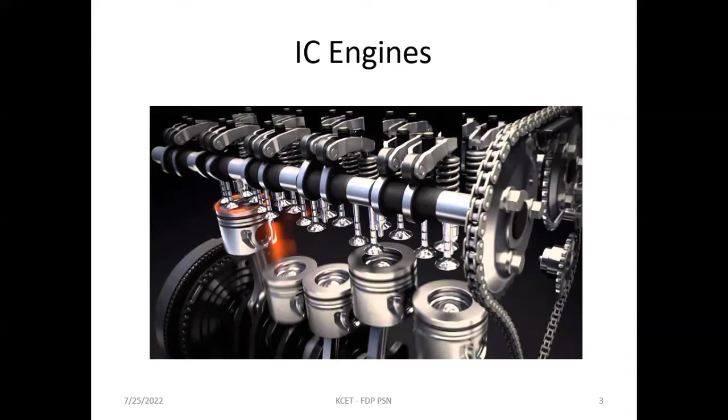This picture shows the IC engines. We already know we are using petrol and diesel as the fuel of vehicles. Nearly 98 to 99% of today's vehicles are IC engine based vehicles only. The main disadvantage is we are consuming more fossil fuels and the pollution is more in IC engine based vehicles. That's why we are moving to electric vehicles.

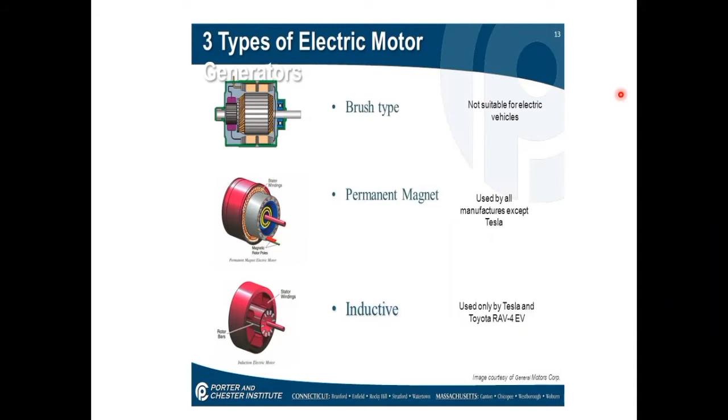The main thing is torque weight ratio. If you see for the induction motor, it will be lesser. So the weight will be lesser for the same capacity. So that's why most of us are using induction motors for many industrial applications. In future, due to the emerging VFD technologies, all the vehicles, I hope, will use induction motors.

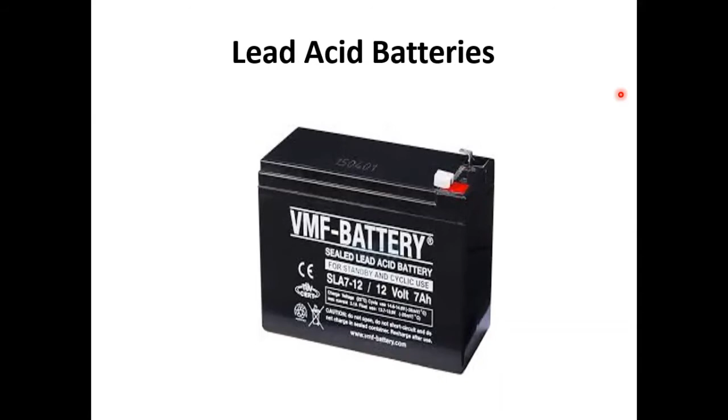Next, we can see the basics of lithium ion batteries. Lithium ion batteries, I think you all know, the energy density and power density are both good. And size, if you compare it with the lead acid battery which most of us are using in our home for our UPS, for the same capacity, for example a 12 volt 100 Ah battery, the lead acid battery size will be very large compared to lithium ion.

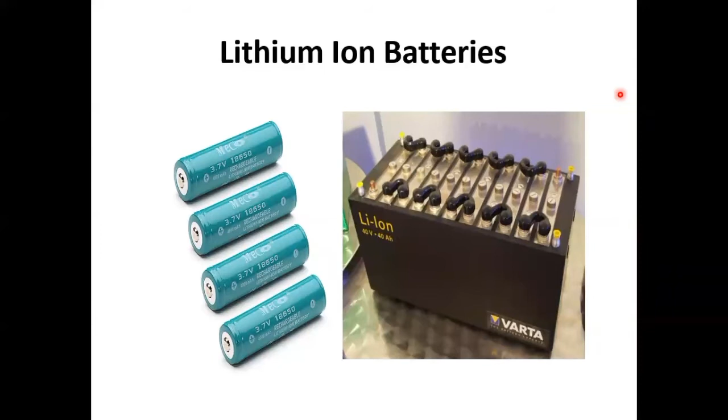And also the energy density and power density will both be higher in lithium ion batteries. That's why we are using these batteries for electric vehicles. We need to reduce the space and also we need to extract more energy. Nowadays, due to the explosive nature of lithium ion batteries, most of them are focusing on other technologies. One is lithium ferrophosphate. A lot of material research is going on there. In most of the cases, they are also preferring lithium ferrophosphate.

The main parameters in batteries are C rate, watt hour, ampere hour, and voltage. C rate, that is the charging rate, is mentioned in quality lead acid batteries also. If you are asking for a battery in any shop, surely they will ask about voltage and ampere hour. Most of the shops don't ask about C rate. Now in most applications we have to focus on C rate also. Lead acid in our home is 0.1 C or 0.2 C, that is C10 or C5 type. So this C rate is also very important.

I will explain what C rate is in later slides, and we are also going to see some simulation analysis for these parameters, watt hour, ampere hour, and C rate. So later on we can see it in detail.

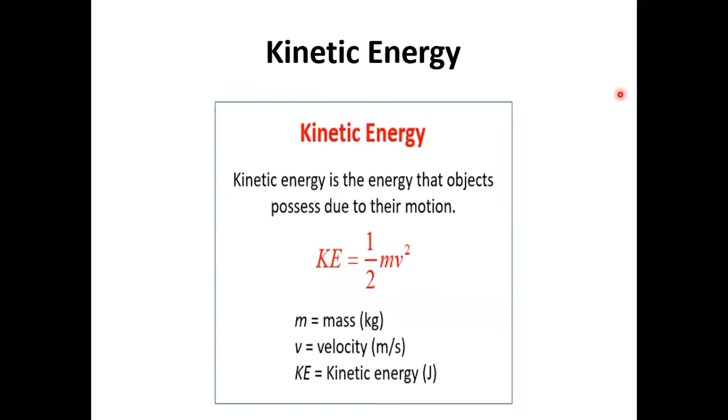So instead of wasting that energy, with the help of a generator, we can extract the kinetic energy stored in the vehicle. That is the ultimate aim. During running condition, this motor generator set will operate as a motor and drive the vehicle. Whereas in regenerative braking, the motor is operated as a generator to extract the power stored in the electric vehicle, and it stores that energy in the lithium ion battery or any batteries available.

A huge amount of power we have to extract within a short time. At that time, even a lithium ion battery cannot store that much power. That's why in most vehicles they are using an ultra capacitor or super capacitor in order to store that huge power. So this is about regenerative braking.

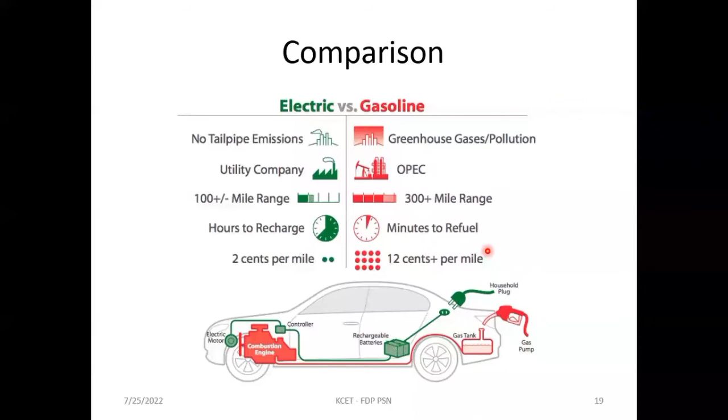Another biggest advantage in going for electric vehicles is the V2G and G2V concept, that is vehicle to grid and grid to vehicle. This is also a blooming area where we can make the power system operate in a smarter way to have better reliability and stability.

So in a charging station, your electric vehicle can be operated in both modes. It can charge or it can discharge. Why does it need to discharge? To support the power system, to match the load demand, to provide better reliability. So both things will happen. So this will make the power system operate with good reliability and stability in the near future.

So vehicle to grid means from the vehicle, power is fed to the grid. That is why it is mentioned as V2G. From the battery, power is fed to the grid through power electronic converters and various equipment between vehicle and grid. Then G2V means grid to vehicle. So from the grid, power is given to the electric vehicle to charge the batteries. This is the G2V concept. This is also possible in a smart grid.

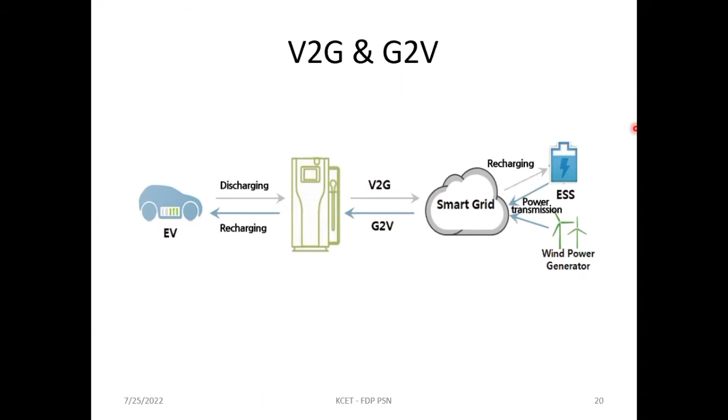Companies are working there. Now Tata Power has installed many charging stations in India. Even in Madurai itself we can see a lot of charging stations. Let's see some electric cars available in the market. This is the 2021 scenario.

Hyundai Kona will cover 452 kilometers per charge. If you charge the battery, you can go up to 452 kilometers. So this is the biggest achievement. For all the motors nowadays, the coverage is very high. Mercedes-Benz has the EQC, MG ZS EV, Tata Nexon EV, it's around 312 kilometers. And Tata Tigor EV, this is 213.

It's the old model. The upcoming models have reduced charging time and high mileage, high kilometer coverage. And Mahindra e-Verito, this is also an old model, around 140 kilometers and 181 kilometers. So this is the 2021 scenario. If you see 2022, more changes may happen. Let's see international cars. These are all in the Indian market.

You see US Tesla. I hope all of you know about Elon Musk and his lot of innovations. Starlink and spaceships they are manufacturing. Tesla has achieved a big thing in electric vehicles. They are also manufacturing batteries, and they claim their batteries can charge within 3 to 4 minutes. So 20C they are claiming. After this discussion, I will tell you what is the meaning of 20C.

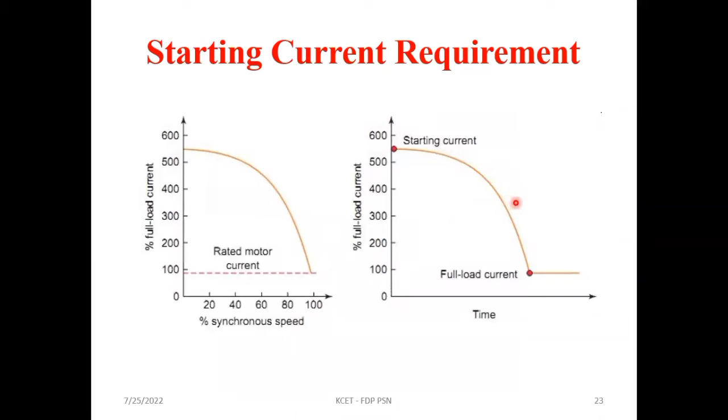Now we can see the basics of batteries. Capacity is normally indicated in ampere hour or watt hour. Voltage rating we all know, in volts. In C rating, they mention C1, C2 or C5, or else 1C, 2C and 5C. Like that, they will mention the C rates, that is the charging rate.

What does 1C mean? For example, if a battery is rated 10 Ah and the C rating is 1C, you can charge the battery at the rated specification mentioned on the battery, that is 10 ampere. So that is the meaning. 1C means you can charge the batteries at a rate of 10 ampere.

Whereas if that battery is mentioned as 2C, you can charge the battery at double its rated capacity. Then it is 20 ampere. So a 10 Ah 2C battery means you can charge that battery at a 20 ampere rate.

Whereas 5C means you can charge that battery at a 50 ampere rate. That is the meaning, if it is indicated before C. If it is after C, it means 0.1, so at the rate of 0.1C. So a 10 ampere hour battery C1 rated means you can charge at the rate of 0.1 rated capacity. 0.1 means 0.1 into 10 ampere; that will come around 1 ampere.

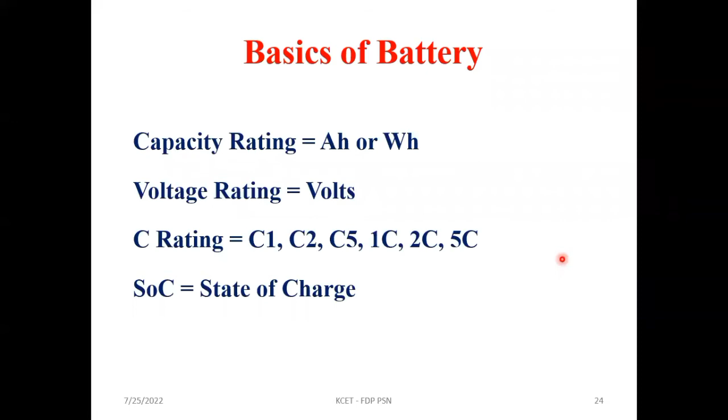So Tesla is claiming that they have a battery with 20C rating. Then you put the calculation: their battery is fully charged within 3 minutes. They made this statement in 2019. Now they may have more than that, but I didn't get that detail these days. In 2019 itself, they said they have batteries with 20C rate, so within 3 minutes you are able to charge the battery. Only thing is we have to focus on lifetime and health of the batteries. For that, they are reducing the charging time to the optimal level. But that is the biggest achievement. So these are the basic things.

If you compare a capacitor and a battery: capacitors can discharge huge power for a short duration, whereas batteries discharge less power for a longer duration. That is the difference. So during the starting of the vehicle, in order to assist the motor, supercapacitors are used. There the power density will be higher and energy density lower, whereas in lithium ion both will be higher in range. But comparing supercapacitor and lithium ion battery, in power density the supercapacitor will be more. That's why we use it along with lithium ion batteries in electric vehicles.

That's the meaning. Now we can see some Matlab simulation. I will show it; that will give you some clear insight about the charging.

I'm going to share. Shiny ma'am? Yes, sir. Is it visible? Yes, sir, it's visible, sir. Yeah. I hope all of you see this simulation file.

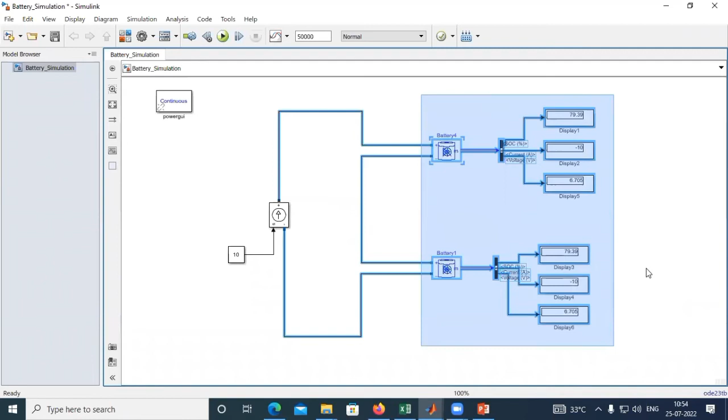Normally, lithium ion batteries do charging like this: up to 80%, they use current controller based charging. After 80% of SOC, they convert to voltage control. That is a different case. For a simple understanding, I am going to do some simulation analysis. Okay. Wait a minute. Its response is very delayed. This is the battery.

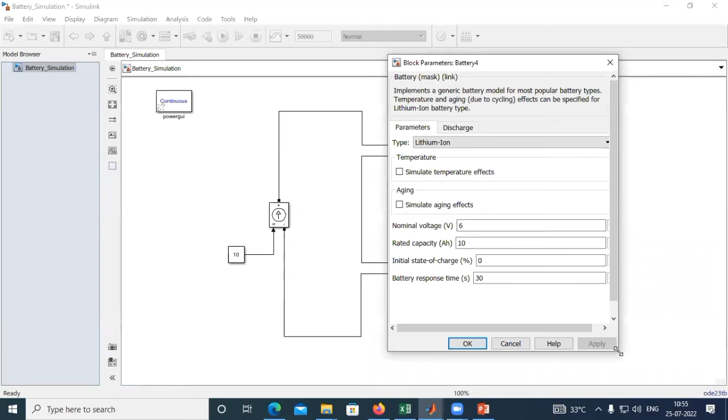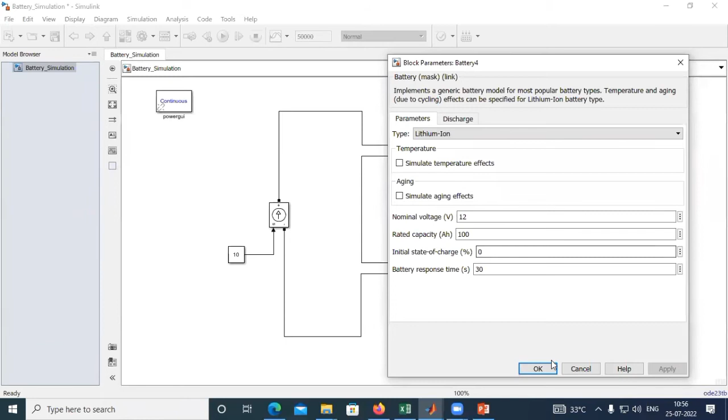So to give all the parameters, you can see for the case which I already told. I'm going to give a rated capacity of 100 ampere hour, voltage, and initial state of charge 0%. Just note it down: voltage 12 volt, 100 ampere hour, initial state of charge 0%. Okay, I'm going to analyse with two batteries. See for a battery also.

Slowly responding. So bear with me.

So I am going to charge one battery. I already showed the C rating also. Okay. 100 ampere hour, 12 volt, 0 SOC, state of charge, for analysis purpose. So at what rate I am going to charge: I am going to charge at the rate of 10 ampere. This is a programmable current source. Whatever value I give, it will deliver as current. So I am giving 10. So 10 ampere at a constant rate.

Okay. So I am going to simulate this. You can see the state of charge. It will start from 0. This upper one is state of charge. Another is charging current, and the terminal voltage of the battery. These are the 3 parameters indicated. Okay. State of charge, current, voltage.

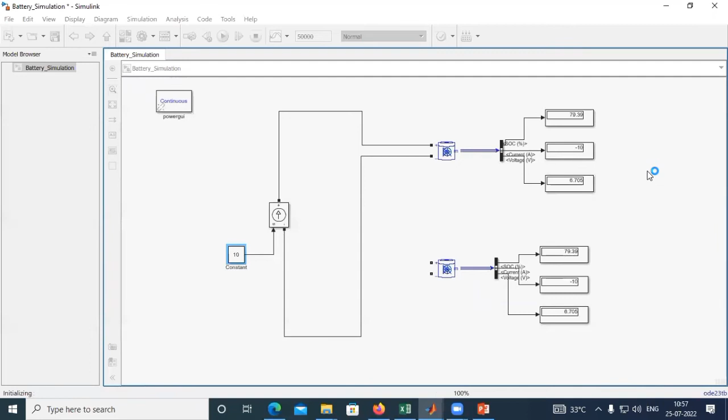The state of charge gets increased. Charging current is 10 ampere. From external, the battery gets charged. That's why it is indicated as -10. You can see the timing. Here it is mentioned as seconds.

Sorry, actually, we are using a 100 ampere hour battery. So our charge for 1C is at 100 ampere. Since it is 100 ampere hour, I am trying to charge at 1C rate. Then I have to give 100 ampere. That's why I am giving 100 ampere. You can see the simulation timing here. It is in seconds. This battery should reach 100% SOC at 3600 seconds, because 3600 seconds is equal to 1 hour.

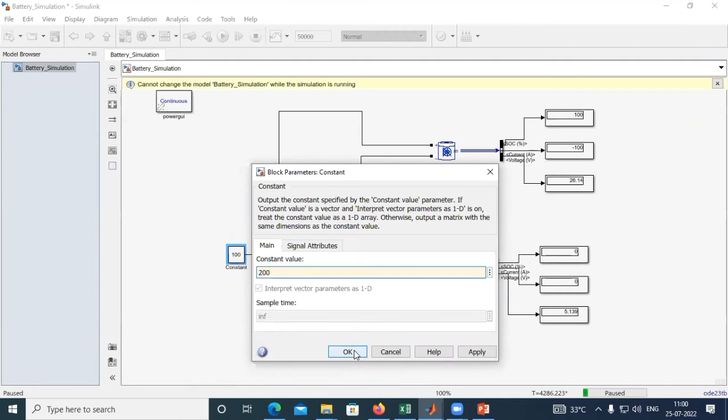For the same battery, if I am charging at 2C, 2C means twice the rated. So 100 ampere hour, twice the rated means 200. I am providing the charging current 200. Ultimately, the battery gets fully charged at 30 minutes. That is 1800 seconds. At 1800 seconds, the battery will reach 100% SOC. You can check with this simulation. Now I am starting the simulation. Sorry, I have already passed. Now only I am going to simulate. You can check, from 0 it starts. SOC starts increasing 24, 28, 30.

I'm stopping at 50. For 50% SOC, you check, 51.27. It's around 922. Our estimate is at 1800 seconds, that is at 30 minutes, it will reach 100% SOC. You see. 100, and I have stopped exactly at 100 and 1802 seconds. It crosses 100% SOC. That is the meaning, because you are charging the battery at 2C rate. This is how we have to do the charging analysis. Okay.

What about 0.5C? We can say it as C5. C5 means your battery rated is 100 Ah. So 0.5 of the rated, that is 0.5 into 100, 50 ampere. That's why I'm giving charging current 50 ampere. C5 means 50 ampere for this battery. So now I am charging at the rate of 50 ampere current. Now our estimate is it will take more than an hour. For C5, that is 0.5C, it takes 2 hours. 2 hours, if you convert that into seconds, means 7,200 seconds. At 7,200 seconds, it will reach 100% SOC. You can check.

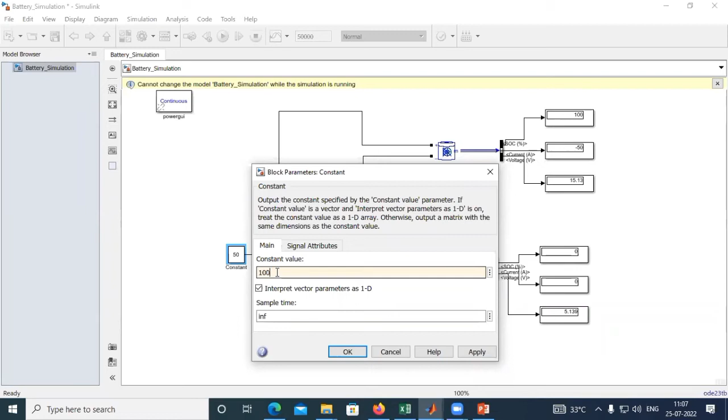So I am going to charge both the batteries with the help of a source at 1C rate. 1C means rated current, that is 100 ampere. Both the batteries are in series, so the same 100 ampere current is given to both the batteries. For this scenario, the battery gets fully charged at 3,600 seconds, exactly 1 hour. You can see both the batteries' SOC levels are increasing in the same manner, because both the batteries are at the same SOC level.

It reaches, sorry, I stopped the simulation. Again I run it, because we didn't see the seconds. I want to show that also. It's fine. Now I paused the simulation. SOC is at 98.22, both the batteries are the same. You see the seconds, 3535. So both the batteries will reach 100% SOC exactly at 3600 seconds.

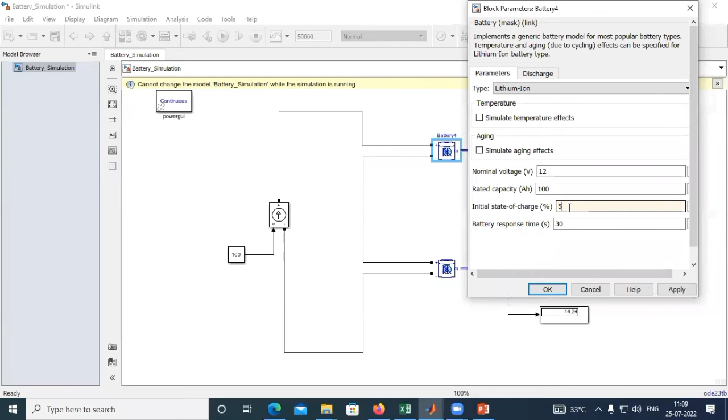Okay. Then we can do another analysis. Why not batteries at different SOC? Depending on material, charging, and a lot of environmental factors, the batteries' SOC level may vary. But before that, we can do another thing also. I am going to make the SOC 50. Here 50% charge is available for this battery. Here also 50% state of charge is already available.

Then both the batteries will fully charge at 1800 seconds, because 50% charge is already available. So in order to fully charge at the 100 ampere charging rate, 30 minutes is enough. Is it right? There it was 0% SOC. Now the batteries already have half of their rated capacity. So now I am going to start the simulation.

See, at 1800 seconds it will start from 50 and reach 100% SOC. Sorry, again I started the simulation instead of pausing. It starts from 50. Going to stop at nearly 97.8, both the batteries. It took 1722 seconds. At exactly 1800 seconds, both the batteries reach 100% SOC. Okay. That is the case where both the batteries are at the same SOC level.

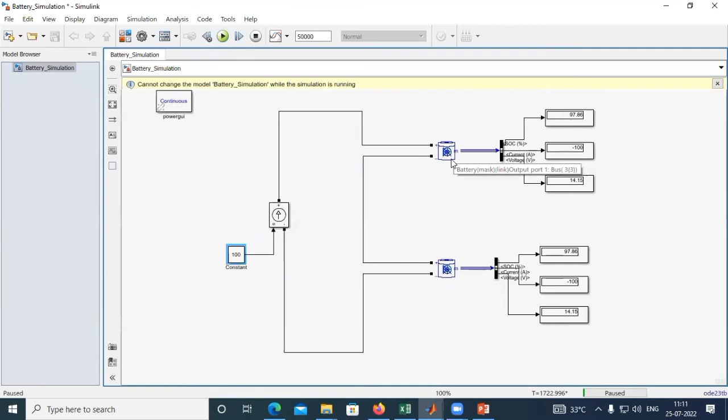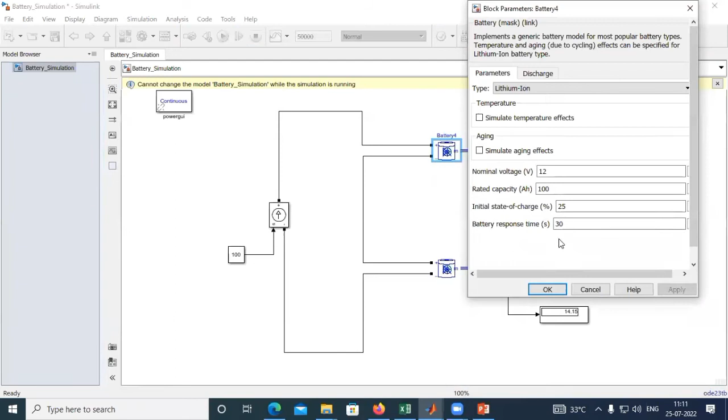What I am going to do is change the SOC level. Here I am going to have it as 75. Here I am going to have it as 25. Okay, you see, this battery is at 25% SOC. Another battery, which is connected in series, has 75% SOC. Now I am going to do the same charging analysis. At what time do both the batteries get fully charged? This battery reaches full charge very quickly.

After that, only this battery crosses 50, 70, 80. The total time required to fully charge both batteries in the pack took around 2700 seconds. Okay, you note it down. Here SOC is 25, here it is 75. So to fully charge the battery pack, the time required is 2701 seconds.

What I am going to do is another thing, using charge balancing. Normally in batteries, battery balancing techniques are there. They use two types of techniques. One is passive balancing and another one is active balancing.

Passive balancing is nothing but balancing of SOC level of batteries with the help of passive elements such as resistors. So they simply connect a resistor across the battery and discharge the mismatch charges. So the energy gets wasted in passive balancing, but the battery gets balanced. That is what happens in most of the batteries. You can check with a lot of manufacturers.

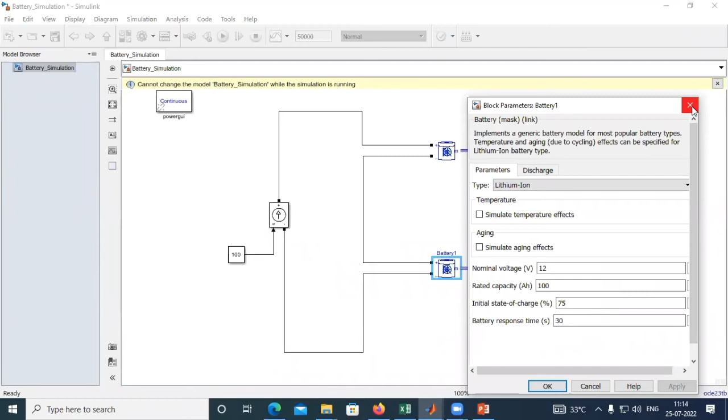Assume that here it is 75 and here it is 25 SOC. Here the energy is higher compared to the battery in this position. So what I am doing is using a power electronic converter, that is a DC to DC converter. Energy equivalent to 25% SOC is transferred to this battery.

So what happened? This SOC will become 50 and this SOC will also become 50, because we are transferring energy equivalent to 25% SOC from this battery to this battery. Now we have balanced both the batteries. Here also 50%, here also 50%. For the previous case, if you see, the energy capacity is the same. The difference is we are balancing both the batteries.

Now I am going to charge. After balancing, if I charge, the time gets reduced. You see, there it is 2770. I'm going to start the simulation. You see, the charging time is 1770 only. For the previous case, to fully charge your battery pack, it requires 2770. Now for this case, it requires only 1770.

So almost 1000 seconds we have reduced by balancing the batteries. After balancing the batteries, if you charge, the charging time gets reduced. So our electrical engineering faculty members can work on quick charging.

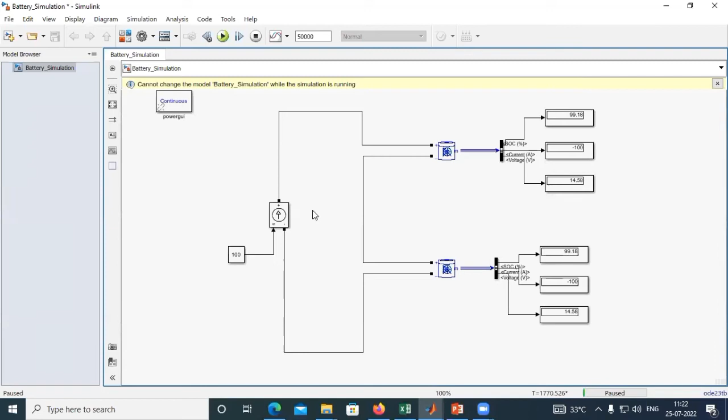So you can focus on charge balancing also. That is the hot topic in batteries, especially in electric vehicles. Large battery packs are there, and master-slave concept based battery management systems would be there. In that you can focus on battery balancing to reduce the charging time. Another important issue in batteries is state of charge estimation. I think most of you have heard the name SOC. Estimating the state of charge is the biggest challenge.

We also face this in mobile phones. When purchased, the charging level indicates correctly. After a few years, many of you notice that from one particular point of time, your charging level drastically goes down. If you take my battery, it will come down to 20% SOC slowly. After 20% SOC, it will reach 5 or less and even switch off within 2 to 3 minutes. That is the problem. That is due to lack of correct SOC estimation.

We are shown that this is your battery charge. What actually happens is, for me it is showing 20% SOC. It will not be correct. It may be 5 or less than 5. That's why the battery gets drained very quickly. It happens in all batteries, depending on battery capacity, manufacturing, all those things. But estimation is one of the biggest challenges in lithium ion or lithium ferrophosphate batteries.

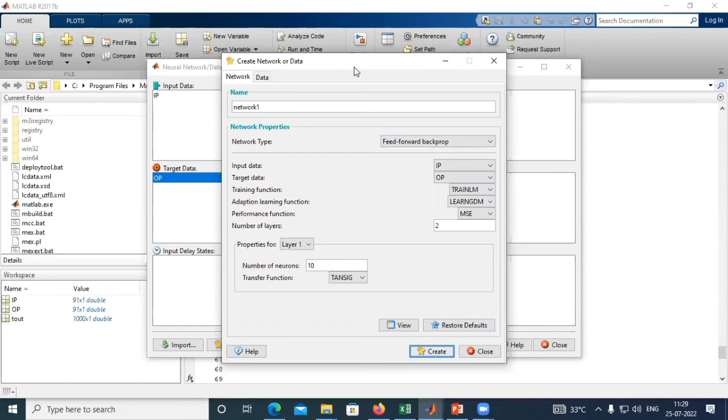Sorry, it's slowly responding. In recent MATLAB versions you can directly give the value, but the remaining things are the same.

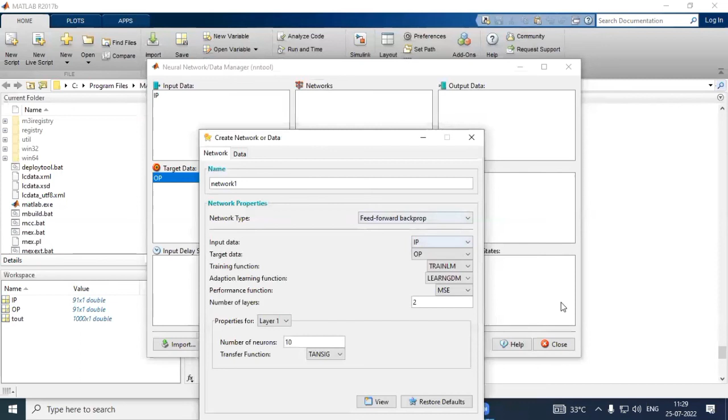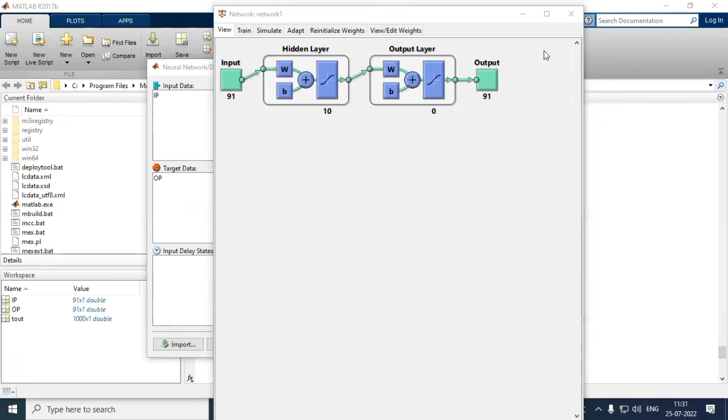Now you see the network here. You can double click to see the parameters. Then you have to again select train, input data and target data. You have to train the network. That's all. Depending on the number of trainings and the comparison, you can come to the conclusion that the training is enough, or else you have to train more times to get the accurate output.

You see iteration and performance here. For me, it's slowly responding; that's why it's consuming more time. Let's just check whether the network gets trained or not. Okay, anyway, given the time, we can leave it because it's very slowly responding.

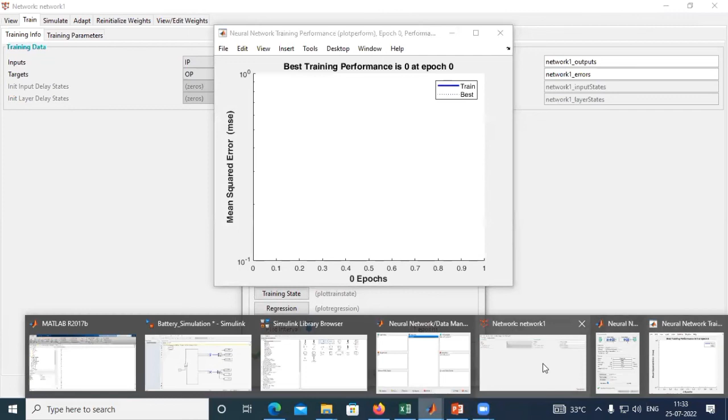Here, after training, you can see the output data as well as the input data. Here, the output is almost the same. After training, you can check the error values also. The error value is almost 0, so training is sufficient. Here we simulated less complex data; that's why the error is 0. Okay, now the training is enough. We can check for our own data.

What I am going to do is export this network, that is network 1. So now we have trained a neural network with our input and output values. This network 1 is exported to the workspace. You can see network 1 in our workspace. To generate a simulating file, you can type gensim of network 1, the file name.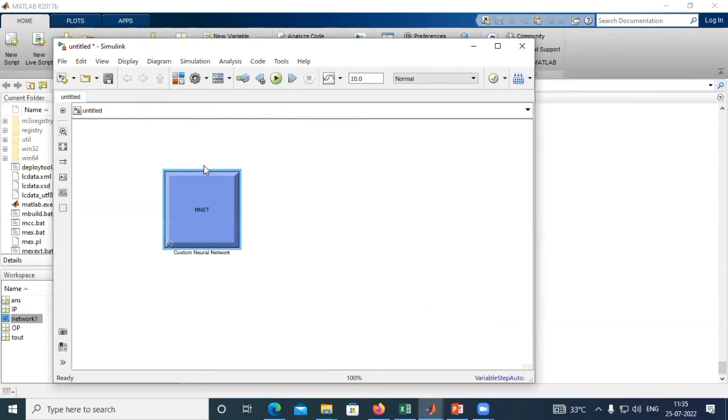One minute. Here, I think the new simulating file will generate like this. Through that, you can check your network by feeding the input data. Here, due to some issues, the input and output terminals are not there. Okay, we have to try it with different data. Just tried. The format, I think, is reversed. That's why the error is there.

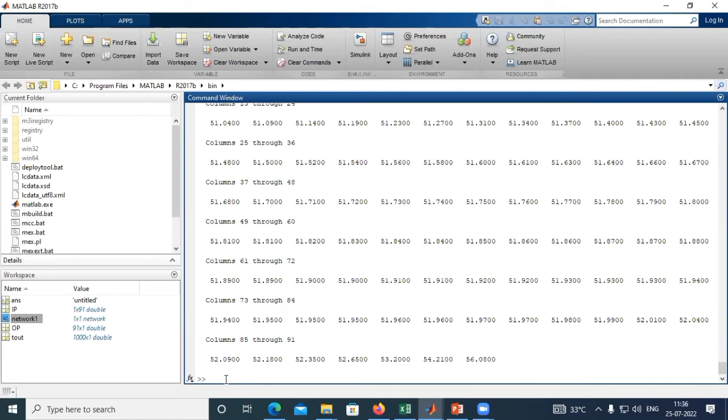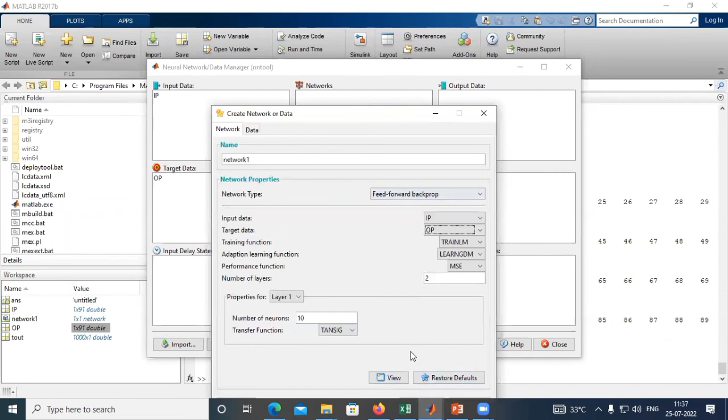So I am changing. I will delete all the data and refeed it. Import IP data, OP target data. Close. You can see, after that you select here. I have created a network. After that, I'm going to train that network.

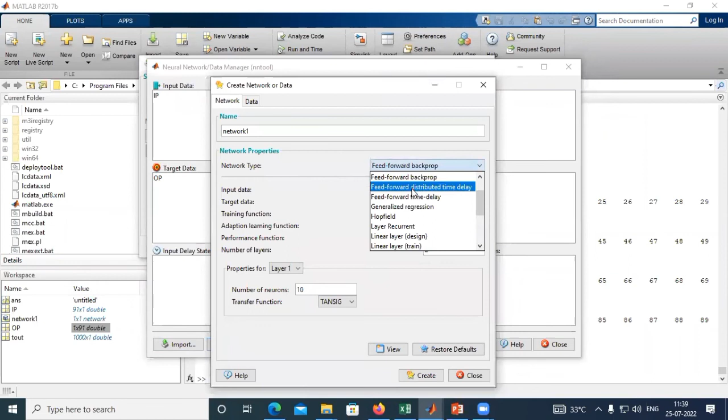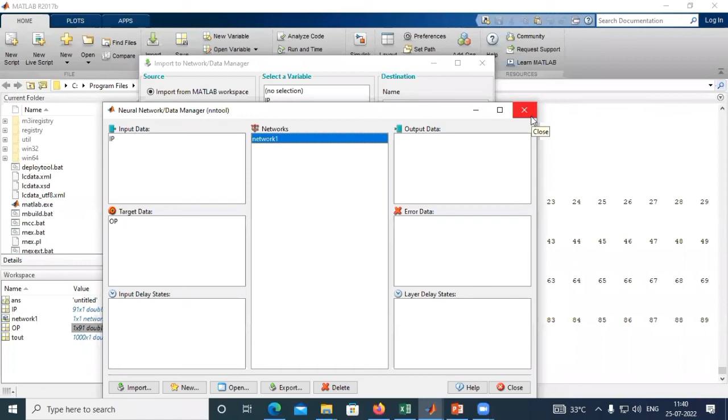So some error is there. Okay, I'll tell the things you can try. A lot of tools are there. Here the input and output data doesn't match. That's why it is not trained correctly. Or else you will get the correct results. I couldn't generate the simulation file also. I already generated it, but that should have input. It does not have input. That's the problem. Anyway, you can try like this.

Instead of VOC, you can try VM, temperature, and other parameters you can take to find the SOC of batteries. For analysis purposes, I used SOC and VOC. You can have different parameters in order to accurately predict your SOC levels. That is also the biggest challenge in batteries. So these are the things.

More than that, converters are also emerging in electric vehicles. To my knowledge, most of the industries have well-versed power electronic converters. So in research, if you are telling any converter has better function over that, that is not successful for publication. So instead of focusing on converters, in smart balancing we can focus on converters for balancing. For other BEVs, they have more efficient converters. So that is my suggestion.